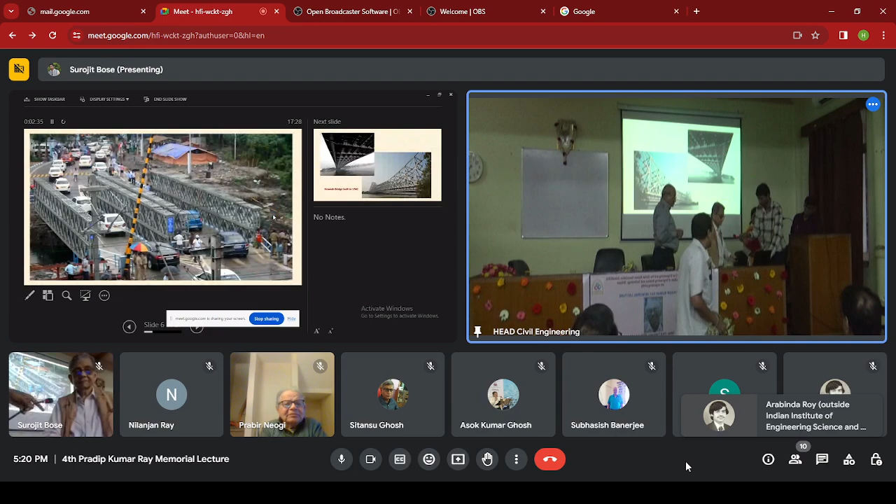Fine. Sorry for this delay.

Well, as I was mentioning, it's the theme of today. When I was given the freedom to choose a theme, I chose this theme, Engineers for Sustainability, basing it on case studies on bridges. You see, sustainability is a much used word today.

Am I audible at the back? Okay, okay.

Sustainability is a word which we hear very often, and it is today considered the only way of deliverance of humanity from destroying this only world we have for ourselves. You see, earlier sustainability used to imply that you are trying to economize on any structure and extend its life. But today, sustainability covers everything. It is not only the quantities or the design facilities that you depend on. You have to consider sustainability at every stage of anything that you do, including even distant ideas like water management, health management, and education.

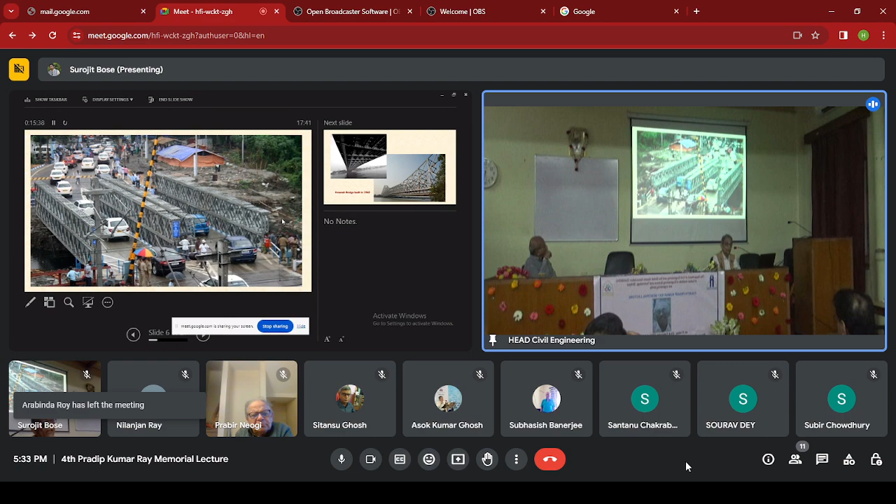Now, this is what we should keep in mind when we take responsibility for designing a vital structure, and we must have preparedness for the same. I will show you a contrasting picture.

Why is this possible when it is not possible for other bridges? For the simple reason that the planners who conceived this bridge took care so that its maintenance could be well looked after. Under the deck, right from the beginning, an inspection trolley was introduced, and that inspection trolley was used by a gang who used to inspect the underside of the bridge on a regular basis.

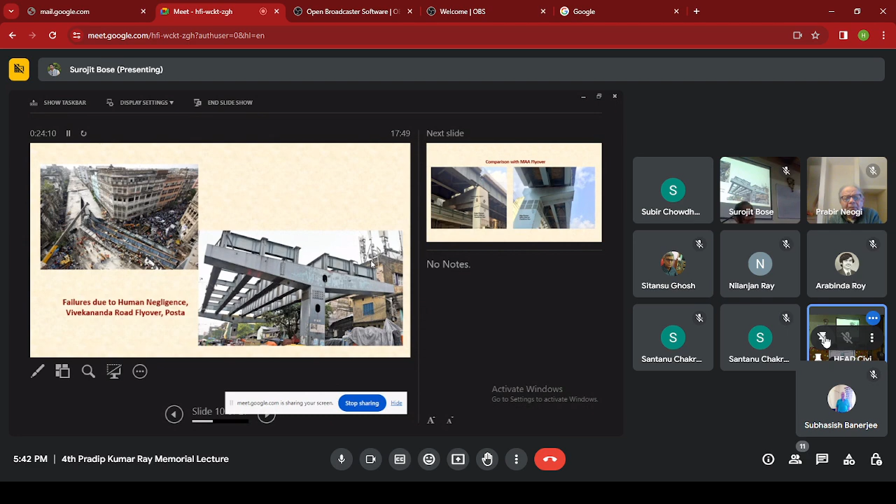You can see big manholes have been made at a location. Since you are students of civil engineering, you can see that they are in a cantilever at the worst possible point, where the bending moment is maximum. We have made holes for entry there, when they could have been done anywhere else. You can see in the column, just below the splice, there are big holes, and unfortunately those large holes are not even stiffened, not even made strong enough to resist the moment coming on them. I can show you also a little comparison.

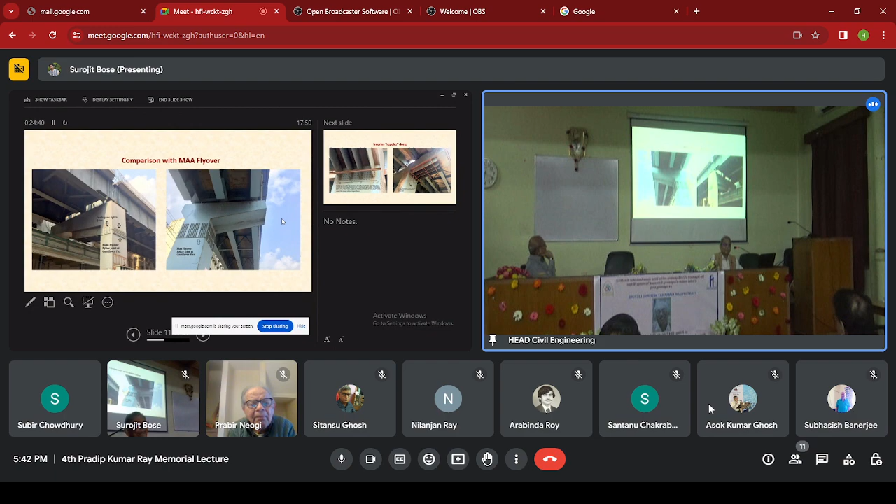You can see 2 pictures. On the left is our Vivekananda Road flyover. On the right is the MAA flyover, which you can still see and inspect. You can see they are identical splices on the left side, and just look at the few number of bolts which have been used. In one phase there are at least 4 rows of bolts, but in the other phase there is hardly 2 lines of bolts.

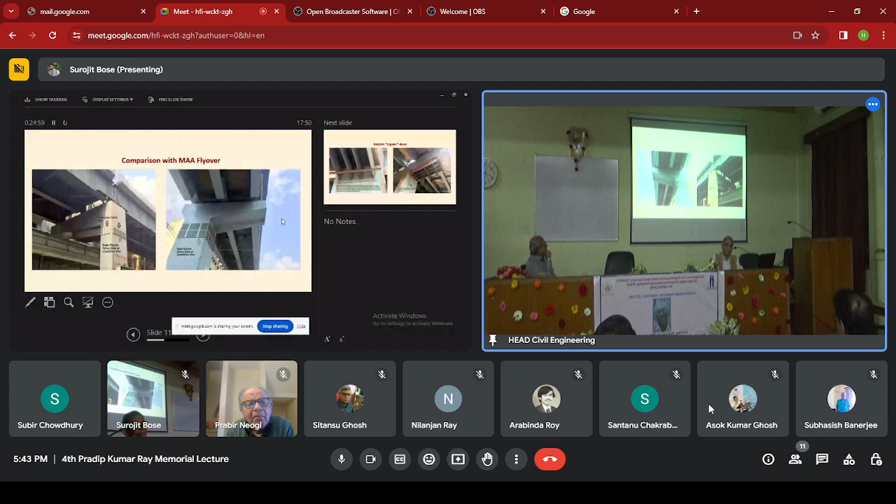Comparison: if you take the MAA flyover splice, just see there are at least 4 times the number of bolts, and all very well driven bolts. The bolts on this fallen bridge were only 16 millimeter diameter.

Nobody uses anything less than 20 millimeter in a structure, and even then 16 millimeter was used. Why they are used is a sordid story. I had an opportunity of examining the design. Somebody had made a mistake in calculating the strength of a bolt. Instead of 4 tons for a bolt, he calculated 40 tons, and reduced accordingly. It's a decimal mistake, and accordingly they put so few bolts and thought the bridge would be safe.

But the agony of the matter is that so many other engineers have also passed by this construction while it was being done. Nobody looked at it intently and tried to caution or tried to recheck.

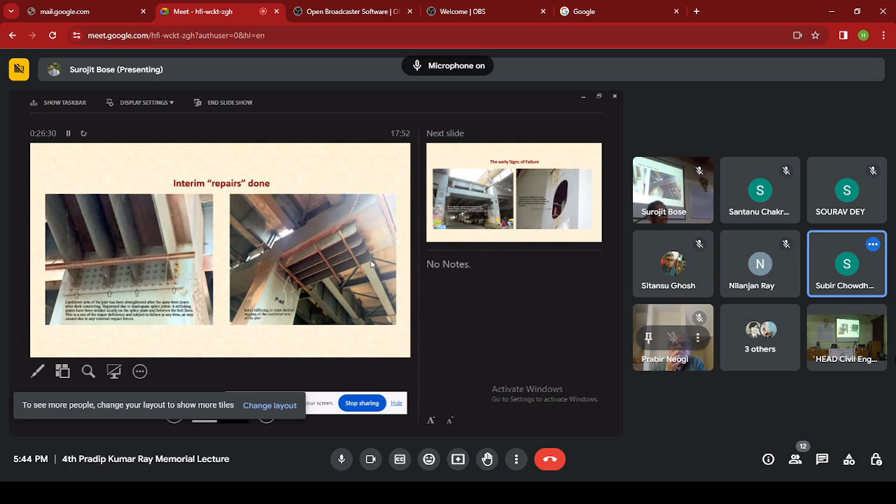And again, another sad thing is these were not unchecked drawings. These were all calculations and drawings that have been checked, I am sorry to say, by renowned professors of a renowned university, and not 1 but 2 persons have checked. Every drawing had the stamped signature of 4 to 5 people: the designer, the department head, the proof checker, and the second proof checker. These are the minimum, and in some cases there was also a second signature of the designer of the client.

Just shows how negligent we are about the potential life of a structure and the potential danger. You can see it was not that people did not realize it was defective. You can see in this picture, one of the cantilever beams had started deflecting.

So what precaution has been taken? They just put stiffeners or brackets, plates, which have been welded. You can see they have been welded afterwards, after the splice had been done, through the row of the bolts, and the welding had been done.

Even after that, it was not very comfortable. So on the right picture, you can see they have put some steel bar across the compression flange of those plates. Now, it's not that we were unaware. We were aware that something was wrong, but even then, a thorough check was not done.

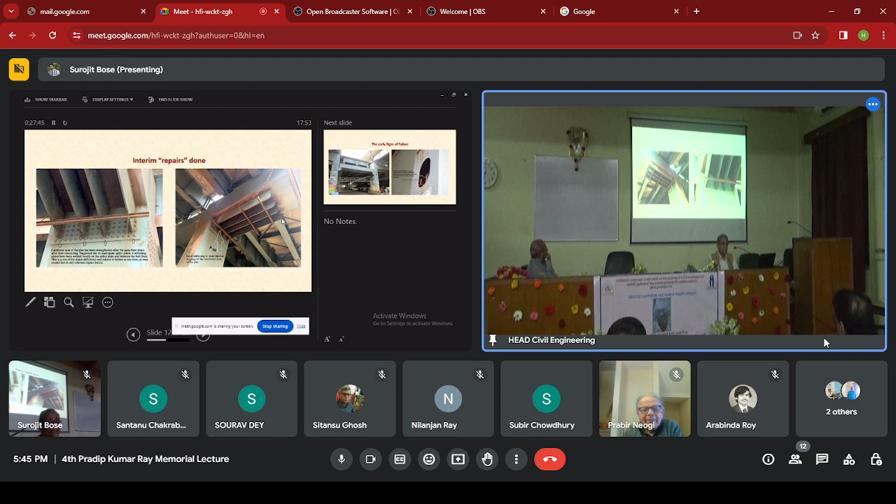And again, some of you can see I was talking to you about those holes, manholes. There's no stiffener. It is a fundamental basic rule that whenever you make an opening in a steel structure, you must stiffen the corners, you must stiffen the edges so that there is no buckling. Now here there is no stiffener.

They are clear. You can see from the beam that there is a large gap between the beam and the column. These are all visible telltale pictures showing no care has been taken.

And as a result, who pays the price? We, the citizens. And here is a poor taxi driver who had parked his vehicle after the whole night's work and been sleeping there, and he gets killed.

Are not all of us engineers morally responsible for such deaths? We are, and we should be ashamed.

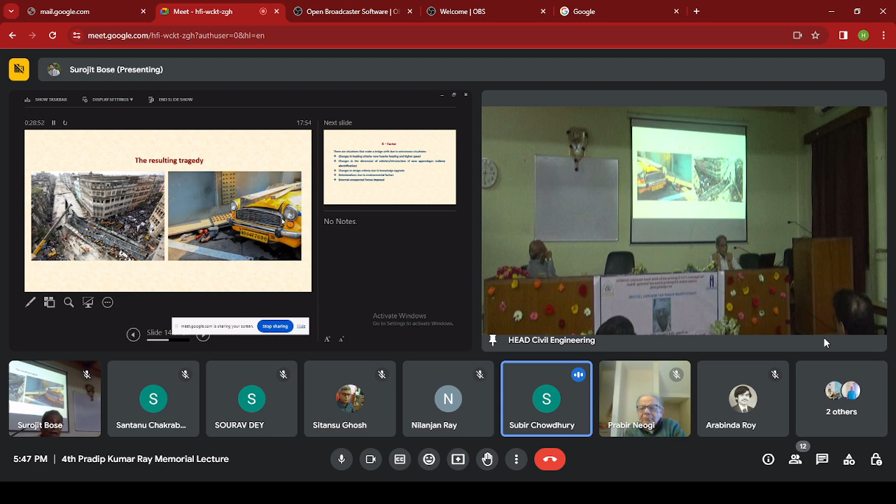But the fact remains that even after such failure happening in front of us, we are trying to hush it up. Not one person has been accused of this failure. They have been protected, and they are allowed to function in the same manner, without any care. And I know of other cases where similar failure may occur.

Now, I mentioned about the human factor. Now, there are other factors which are not directly under human control, but they do cause failures in bridges, and they are all impediments for sustainability.

You see the changes in loading. One designs a bridge for a certain loading. In railways, wagons have got a certain axle load, but then people, to increase efficiency, increase the axle load in the wagon without checking the design of the bridge. We had lorries earlier carrying only 10 to 14 tons. Today we have lorries which carry 28 tons, 30 tons. Again, the axle load is increased, and we seldom check back a design to see whether it is capable of taking that.

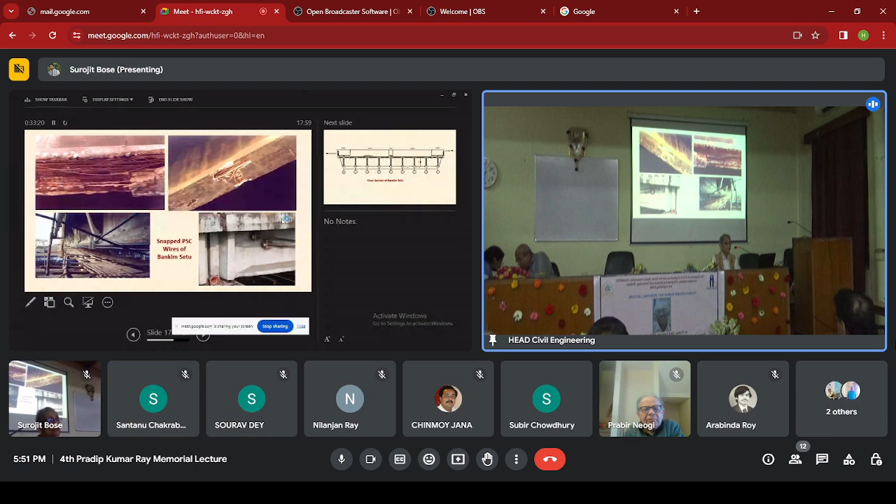Similarly, I am showing you another example - a known structure very close to you. This is the Bankim Setu across Howrah Bridge, near Howrah station, through which many of us have passed. You can see in the bottom picture on the left-hand side, the trains are standing. This is across the platform, and it is very visible, this bridge. Shatabdi and Rajdhani, all crack trains start from exactly this point, where what you are seeing are not wires for television or video, but pre-stressing wires.

They were supposed to strengthen the girder. They are part of the girder's design, these pre-stressing wires. You can see on the right how it is happening - the bottom concrete is just falling off. It's just like plaster, it is not like concrete at all. And the repair was very difficult because there was no provision for maintenance. The girders were facing each other, so nobody could go inside and change the pre-stressing wire.

So what had to be done is external pre-stressing. You can see on the bottom right picture that we have put clamps from which pre-stressing has been done, and the damaged pre-stressing wire has been replaced by external pre-stressing.

You can see on the picture on the... Where is the pointer? Oh, I am so sorry. Okay, back this way. I have got to point like this, is it? Okay, okay, you can see, can you see the point?

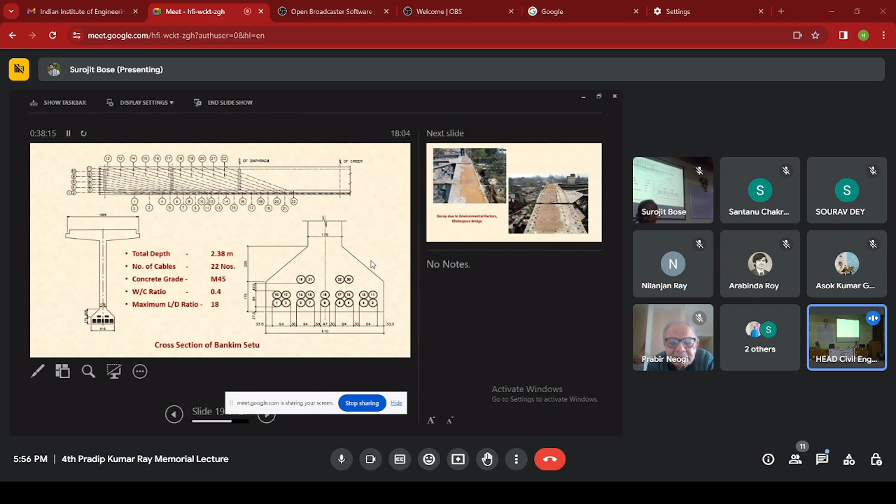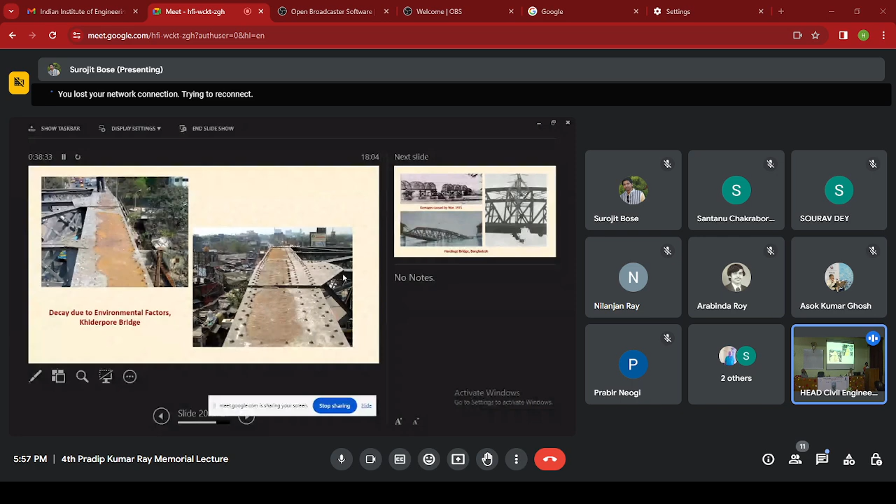This is another picture of a natural decay which was much beyond human factor. This is an environmental decay. This is the Khiderpore bridge which leads to the Diamond Harbour Road, one of the artery roads to Khiderpore. It's a steel truss. From the outside it looks very good, more than 100 years old. But if you look at the roof, at the top chord, 20 millimeter of metal thickness has been eaten away, and all the rivets are missing, and this is not a human doing.

This is vulture excreta. It used to be a resting place for vultures, because the carcasses which used to come by the canal from Calcutta used to get stuck with the lock gate there, and that's why vultures found this a very comfortable place for getting their food. Vulture excreta is considered one of the most corrosive materials, and that took away 20 millimeter thickness of the top plate in the process. Nobody noticed till we went for inspection. That's the unfortunate situation with our bridges, which are important structures.

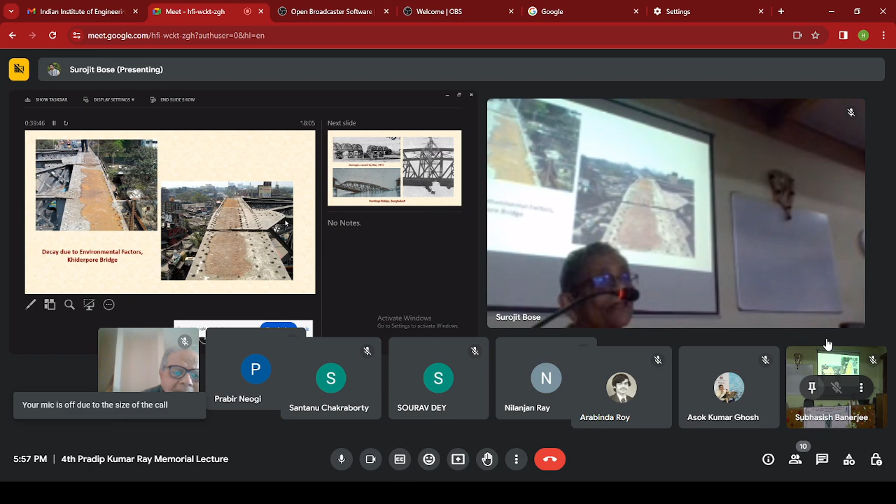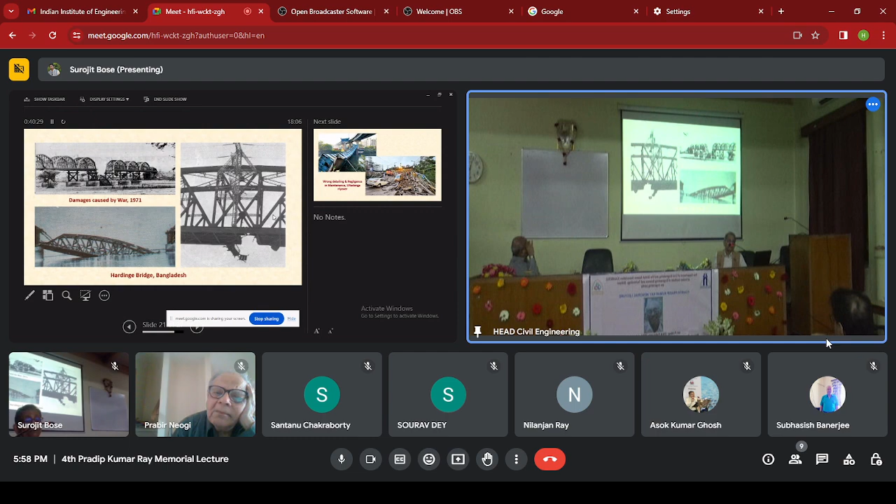The bridge did not fall down. It did not get toppled, even though it had deflected and tilted. But it was possible for engineers to undertake repair. A very unusual state of repair could be an item for another talk. But what happened is engineers did repair that within a period of 6 months, and it was a moment of glory for the Indian engineering profession, because all other developed countries like USA and UK had said it cannot be repaired.

By repairing this, that bridge is still today functioning. It celebrated its centenary in 2015, and it is even today functioning, carrying 2 tracks of broad gauge. So by this sort of repair and rehabilitation, one can contribute to sustainability, one can contribute to the Earth's meager resources, and one can increase the lifespan of every structure that we have built.

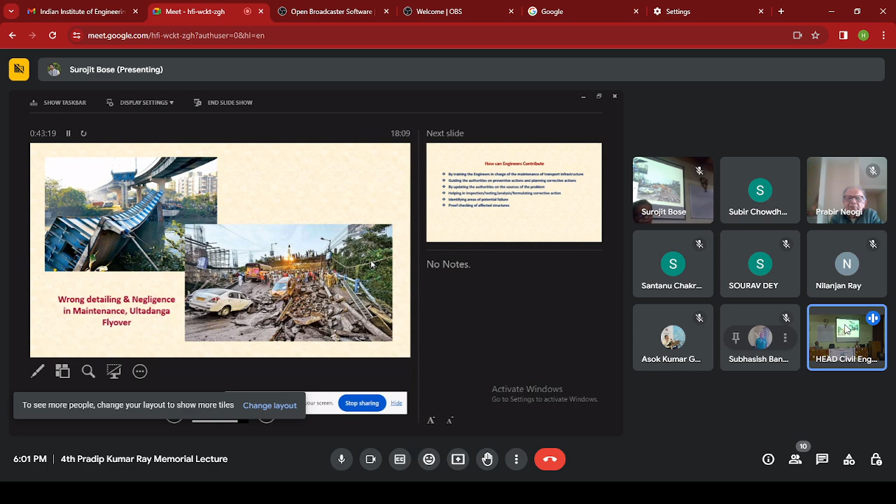So what we learned - I do not know whether I have been able to explain enough to you the importance of engineering for sustainability, because it is we engineers who can contribute to the sustainability of the infrastructure that has been built. We can train our engineers with all these cases of failure and let them learn from it. We can guide the authorities on preventive action and for planning corrective action in time before failures happen.

I showed you the Rabindra Setu or the Howrah Bridge. I did not mention why that bridge is so different. There is a simple action taken by the Howrah Bridge Act, which was enacted in 1907. They provided that when the bridge is constructed, all the citizens of Howrah and Calcutta will have to pay a certain tax.